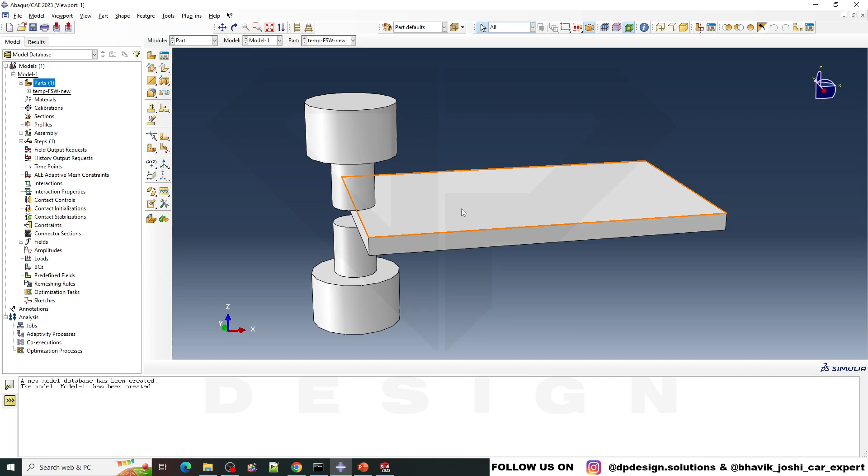Before moving on to the material section, you have to be aware that Abaqus has no unit system in the software. It will not show any units in Abaqus. So some people might get confused if they are using it for the first time and don't know about this system.

They have to know which system to follow. There are certain systems you have to follow while giving units in Abaqus or applying any values for properties. So if you are selecting for length, there are four different unit systems available.

If you are applying for meter, you have to follow this panel. Let's say I will select this SI system for the selection.

So what do I have to give? I have to give the density in ton per cube, energy into millijoule, stress into megapascal, time into second, mass into ton - like that I have to follow. If you miss any of this, if you mismatch, then the results will be very scary.

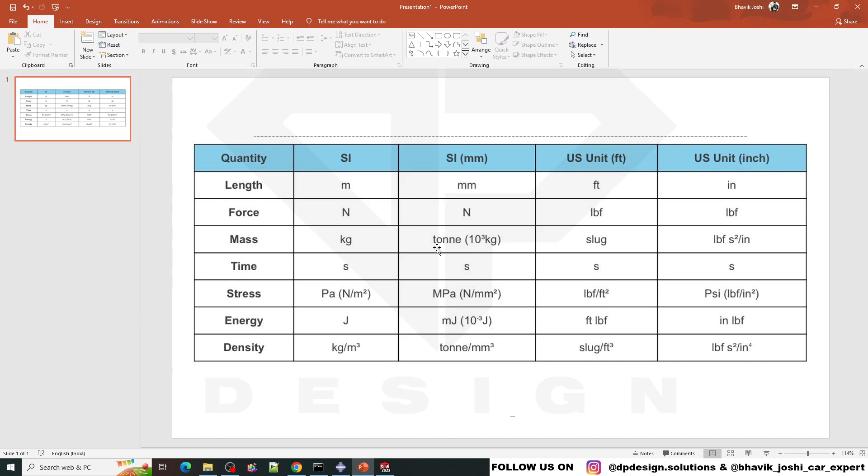So for that you have to strictly follow this. If you can, screenshot this and follow the practice while using Abaqus. So let's say I have imported this model.

Now I have to apply the material on the parts. So what I have to do - I'll just go to material and go to create. Then I have to apply the name of the material, whatever XYZ material you want to apply, then you can select.

While going into general, you will see density, Depvar, and all the other options are there. For now I require only density, which is ton per cube. So what I will give - 7.87, e raised to minus 9. Okay, this is my density.

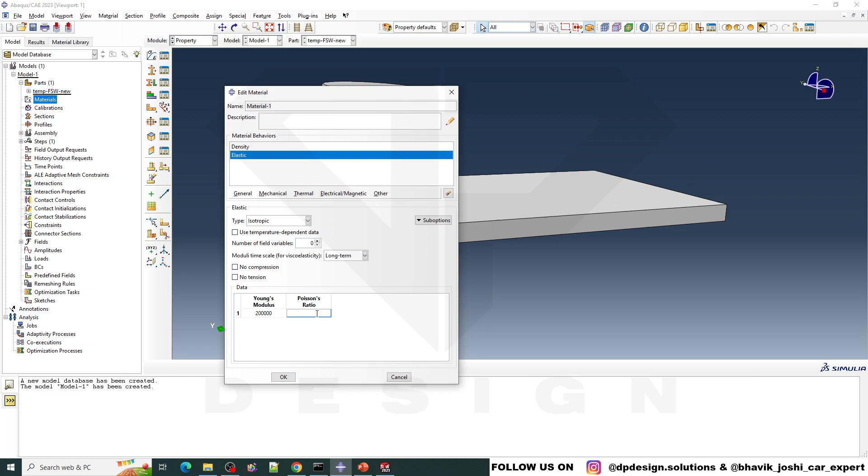Then I will go to the material section and go to elasticity. In this elasticity you can apply the Young's modulus, which will be in MPa - 200000, and Poisson's ratio as usual 0.29 or 0.28, whatever you can give.

So I have created the material, as you can see, but I cannot directly apply this material into the parts. There is a system which we have to follow - first we have to create the section which has the material in it.

Let's say I will create the section. You can create the section from here as well. Just go to section and select homogeneous, because it's a homogeneous material. Steel is a homogeneous material, so you can give homogeneous material, continue.

It will show which material you have to select. Like if I have created material 2, then it will also showcase material 2 as well. So in section 1, whichever material you have to apply, you select that, and the section will be created.

Now after the section is created, I have to apply that section into the parts. How can I give this? You can go to section assignment - there is a section assign option, go to assign. You can select from here as well, assign section, and I will go from here, section assignment.

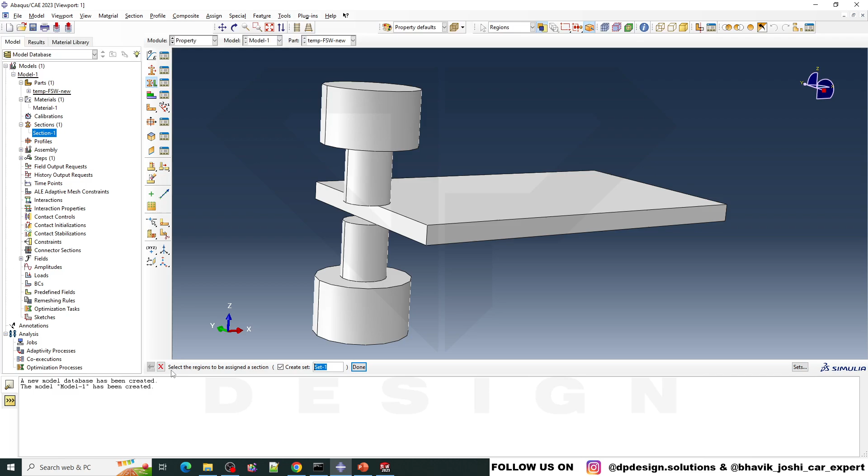Now in this panel, select the regions to be assigned a section. So what I will do is select the section and done. Which section do I have to apply? Section 1. Just like material, you can create various materials and various section types.

Which is a solid homogeneous material, so I have to apply it. Now as you can see, my part is very different from others - it's showing green. What does this denote? It denotes the material has been assigned in this part.

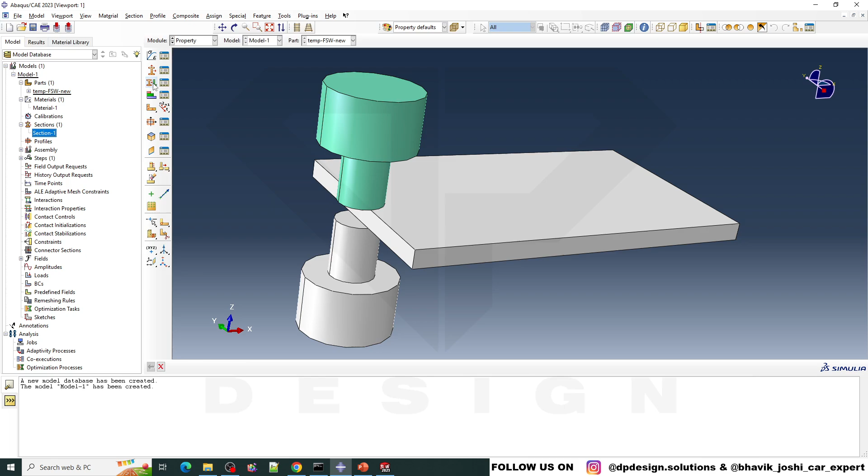So for the rest of the parts you have to apply the sections accordingly. I will apply the same section for this part as well - section assignment, and okay, now I will give it to part 1, part 3, part 2 and part 1.

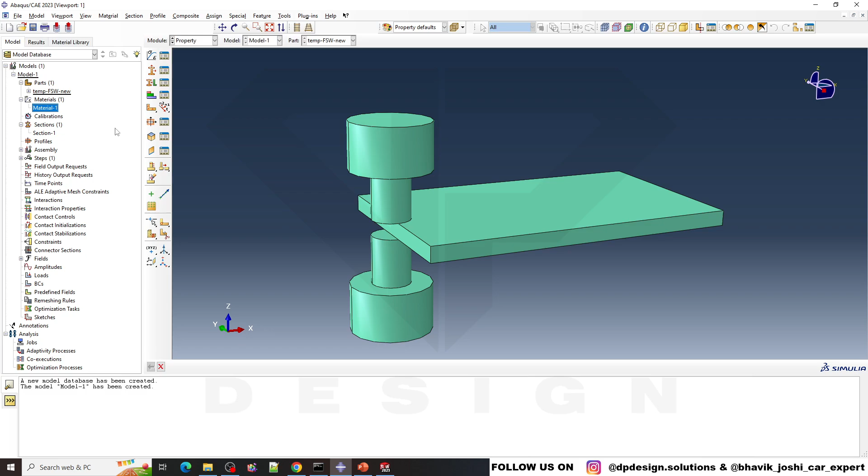So material has been assigned. That's how you can apply the sections and materials, and this is how you can create the materials. That's it for the video.